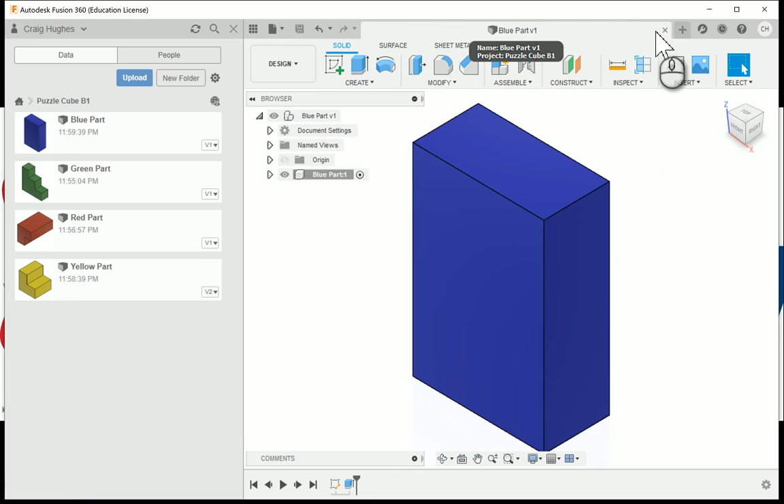This is solely for instructional purposes. Here I've got each one of the individual parts, each within its own design file. What I'm going to do is close out of all of the part files up here in the main window until I'm left with an untitled design file, but I can still see the 4 parts in the data panel.

Before I get started on this untitled design file, I'm going to hit the save button, and this is something you have to do before you can start these next steps. I'm going to call this the puzzle cube assembly, and hit save. The puzzle cube assembly file will be saved here.

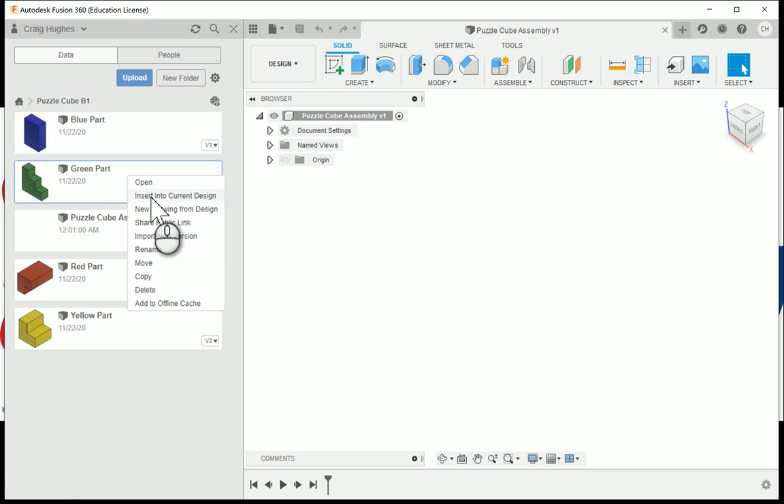I'm going to keep the data panel open, and start with my first part, the green part. I'm going to right click on this and choose insert into current design. Right now it's going to automatically set that at the origin, and it's going to be ready. I'm going to go ahead and say OK.

Before I do anything else, I'm going to hit the drop down arrow, choose the green part, right click, and choose ground. I want to make sure that when I drag this part, it does not move on me, that I should not be able to drag it around on the screen. If I have it ungrounded, this is what happens - I do not want this to happen. So I'm going to hit undo to place it right back where it should be.

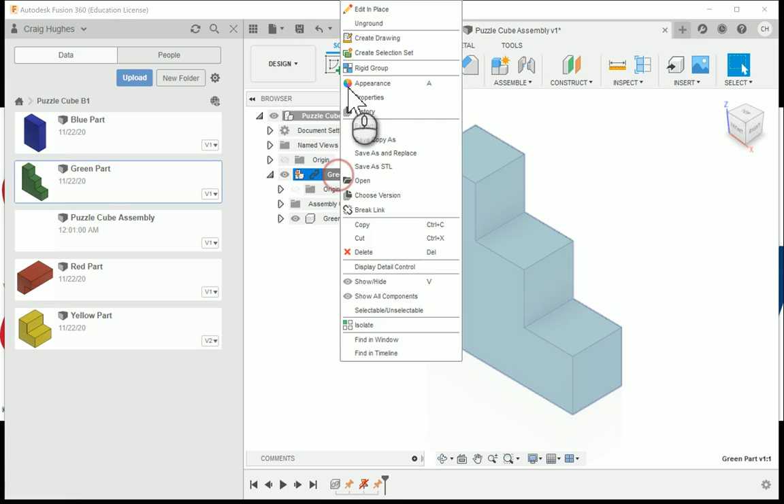You have to make sure you hit ground from the expanded part, because if I try to ground this one, you'll notice it does not take. So I need to undo. I'm going to hit unground on this one, which looks like the sub-assembly. I'm going to choose the green part and choose ground. Now when I click and drag, nothing happens.

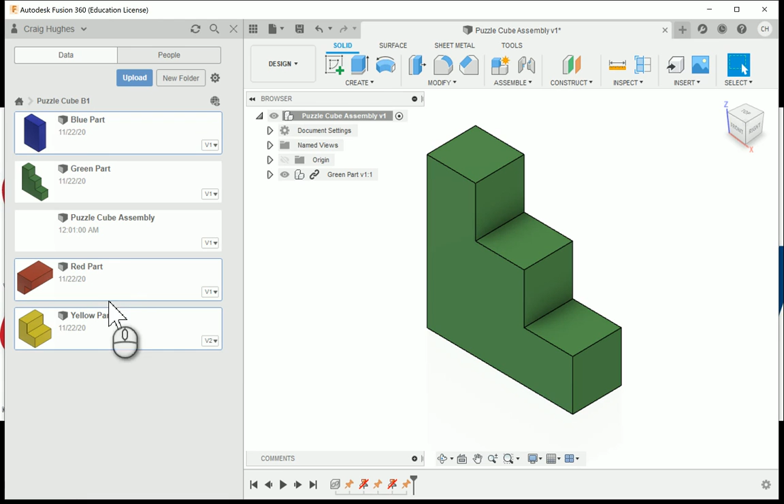Now I'm going to collapse this menu for the green part. I'm going to right click on each one of these parts, or I can hold Control, select, or Command if you're on the Mac, and choose all 3 parts. Right click, and you can see you can either open them, move, copy, but what we want is to bring them into the design.

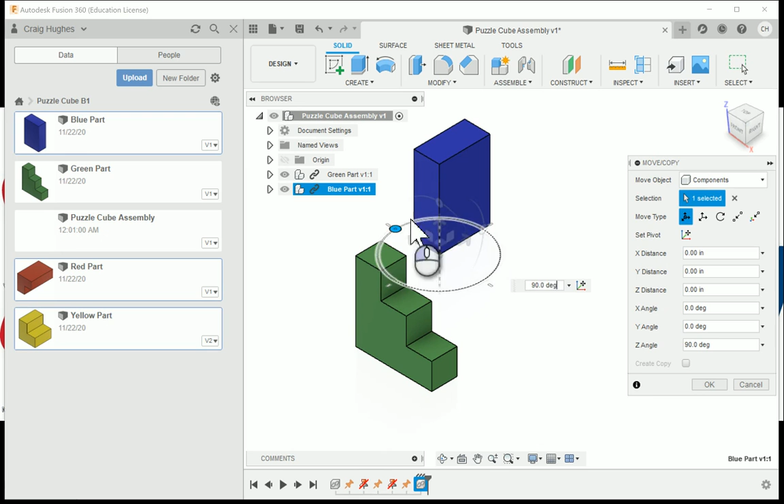I'm going to hold down my left mouse button and drag the blue part in here, and move this over into position in my design. It's going to be over here on this side of the puzzle cube, facing in this direction, so I can turn it to the position I want. There's the blue one, and I can right click and say insert into current design, or hold down my mouse button and drag it into the graphics window, and that'll also work.

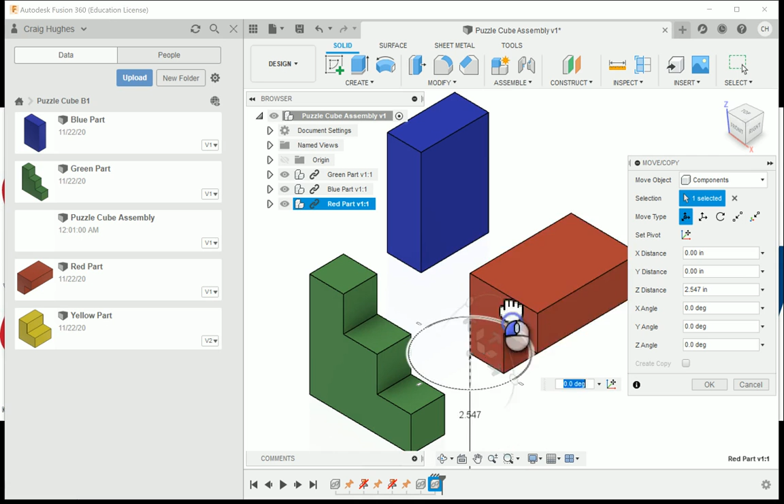This one is very similar. I'm going to position this to be in the position it needs to be in order to be assembled. I always like to go through and see how the faces line up, and I'm going to drag the yellow part in there and get it placed.

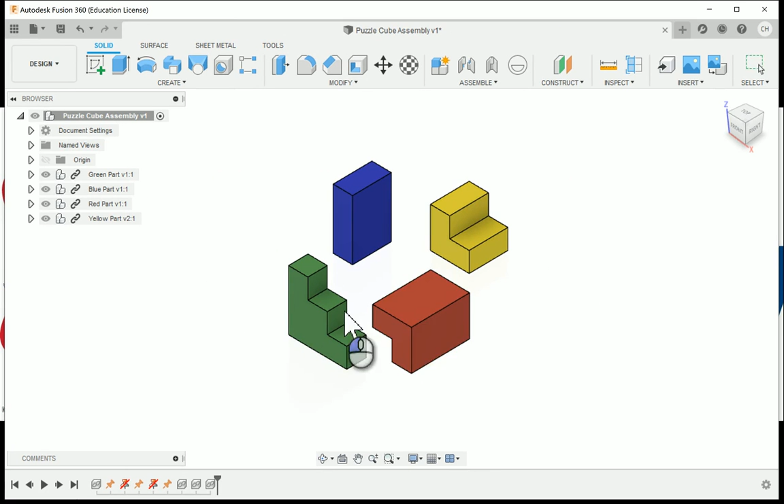Alright, once I have them in there, I can go ahead and hit close the data panel. So here are the 4 parts that make up the puzzle cube. For this example, and in order to start assembling, green is not able to be moved, but now if I click and drag, red is able to be moved, yellow is, and we do not want to ground these other parts. Only the first part do we want to make sure that it is grounded.

And I'm going to go up here and under the assemble panel, I want to choose joint. And within joint, I'm going to say capture the position. And I want to capture the position of all the parts. So the first thing I want to do is look at what parts I want to assemble to the green one. So like here, my blue one, if I hover over the face, this face is going to go up against this side of the puzzle cube part that I need.

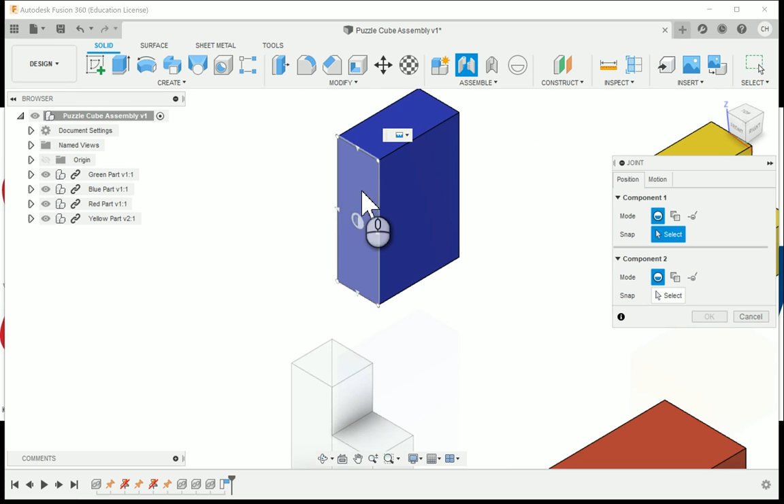So actually I'm going to notice that here I've got some different points along here on the faces, which are known as joint origins. And these joint origins are going to be points that I'm going to find that are matching. If I need to, I can hold the command key down or control, and that'll lock me in on that face, and I'm going to choose one of these points to where they're going to be located. So one of the easiest ones to pick is probably this one up here in the corner.

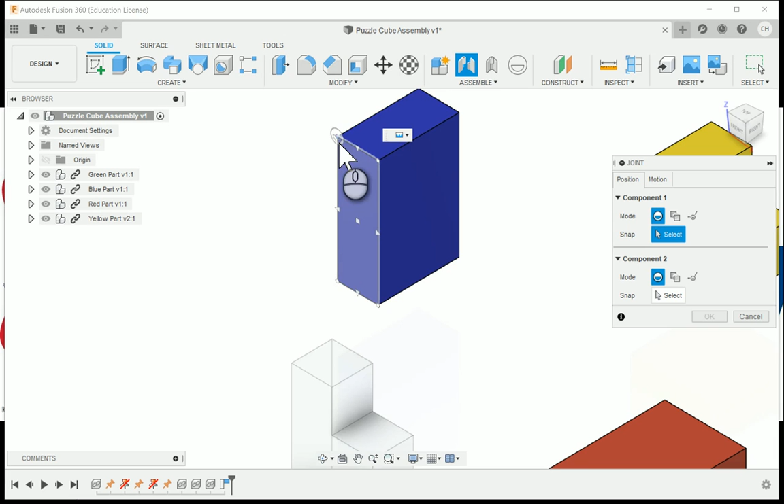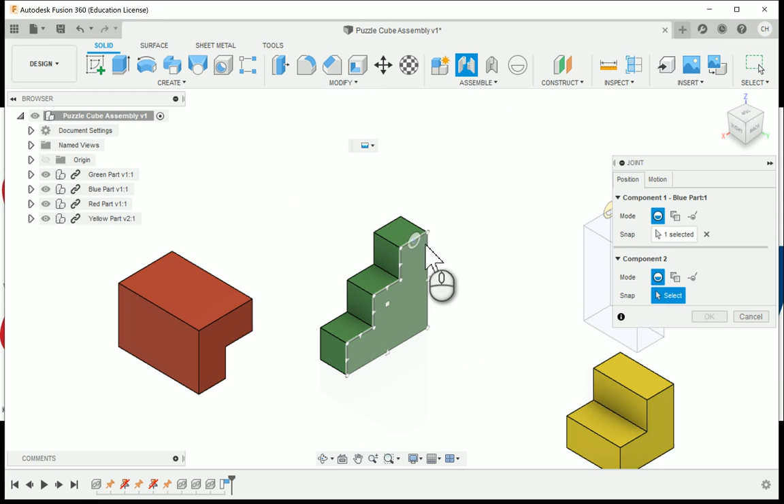So you can see the little joint origin snap, that little circle that looks kind of like a smile, almost like an open mouth face kind of thing. That's called the joint origin snap. And I'm going to place that, and in here, if you hover over any of the faces, you're going to notice you get these other points to line up. Using the view cube, I'm going to turn around here, and I'm going to pick this corner. So let me hold control. I'm going to pick that corner to where it's going to match.

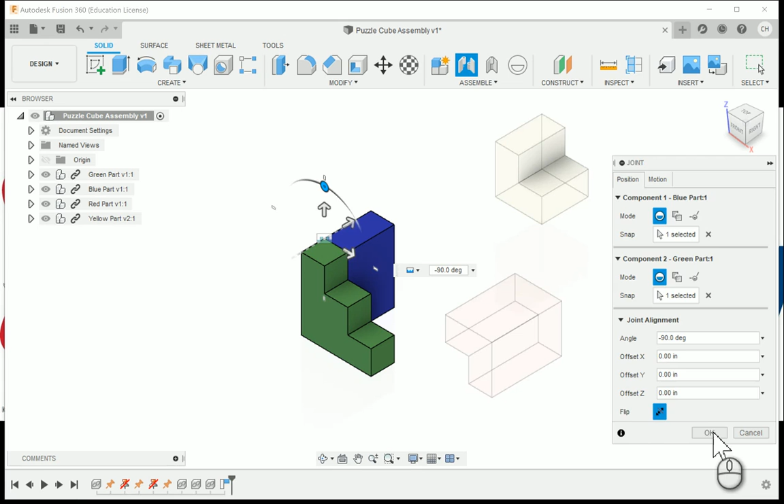And here, from this little menu, you can choose what kind of joint you want. We want rigid, and we're going to use rigid for all of these. But if I choose revolute, revolute's a spinning joint. A slider joint would have it go sliding. And a ball joint would have it kind of roll around like this. But we want to choose rigid. And it's going to shake a little bit there to show that that's rigid. And I'm going to say OK once I have that joint in here.

So you're going to see a little icon that pops up here, which is the rigid joint. It also shows up down here in your model history tree. If you also take a look, you've also got a joints folder now. Rigid 1 is the very first joint that you applied in this file. And I'm going to continue to look at the parts.

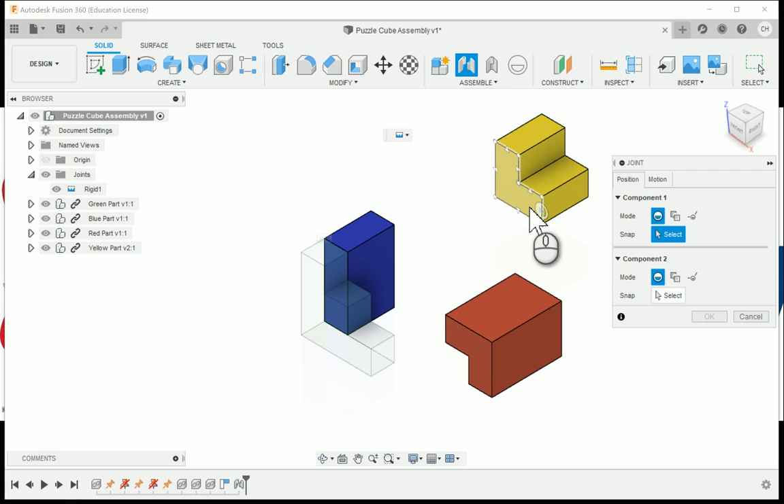So let me look at my yellow part here. The yellow part is probably going to sit down next to the green part here. Use this bottom corner there, and we'll see if it's going to hit right in the spot that I need it to. Should sit right there, and that's exactly what's going to happen. And I can go ahead and say OK.

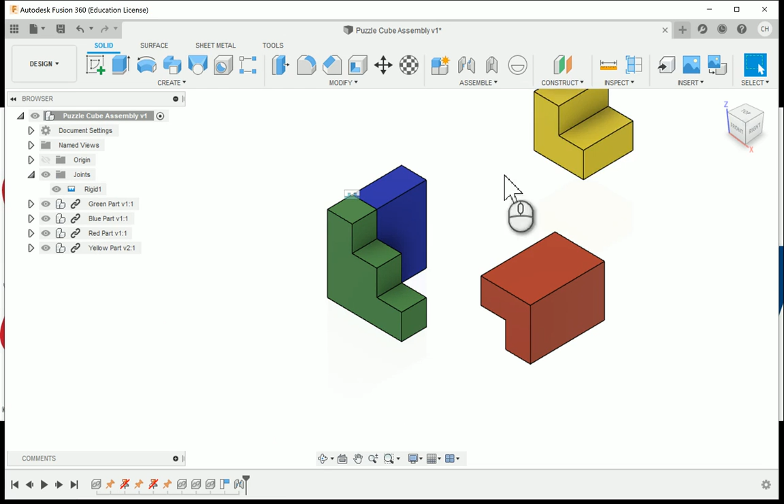If it doesn't, I can always select the joint either from here or from the listing or down here in the model history tree, right click and say delete, and then the joint goes away and I'm able to get back the movement that I need. So again, if you happen to need to change that, I'm going to reapply the joint to the right location. Part moves to the location, I say OK, and I'm able to continue to assemble.

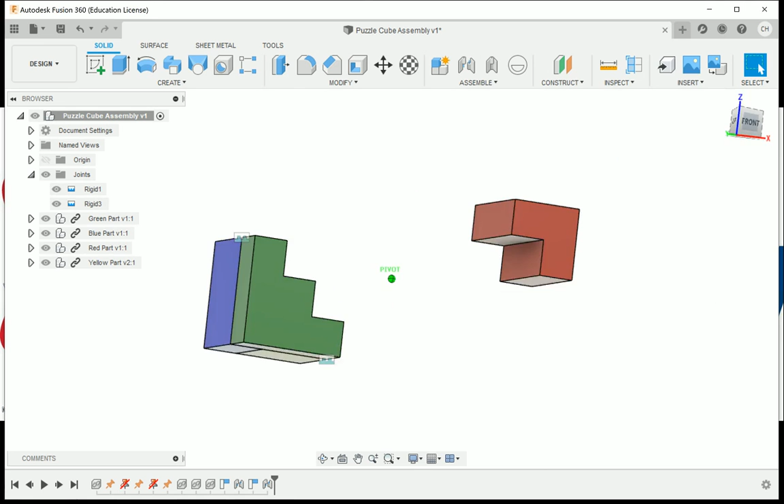So now, joint, I'm going to choose this underneath face here. There's this corner, and where is it going to hit? It's probably going to hit right in this corner, and that goes through, and I say OK. So 3 joints have been applied. If I click and drag on any of the parts, none of them move. If they moved on us, that means we would need to reapply a joint or change them in order to make sure that would happen.

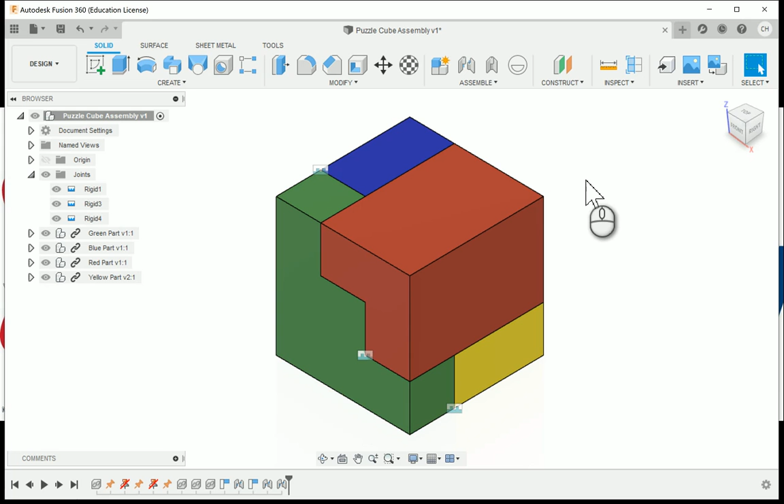Okay, so this is finishing up the assembly for the Puzzle Cube project and the method for you to be able to assemble your Puzzle Cube.